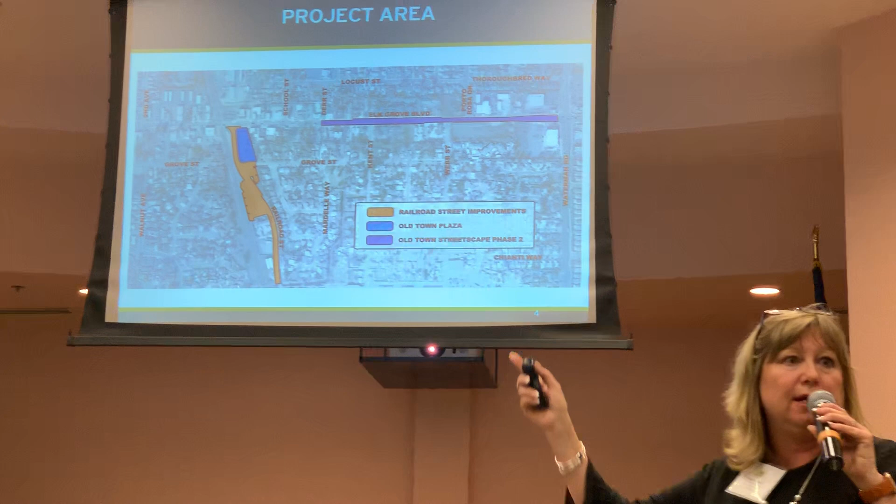This is the project area. As you can see, the orange is Railroad Street, the approximate boundary of the Railroad Street improvements. We'll show you more about that. The blue is Old Town Plaza, where we have the food truck mania events right now, the farmers market, and various events like that. In purple is Elk Grove Boulevard, the section where the Phase 2 Old Town Streetscape improvements will be happening.

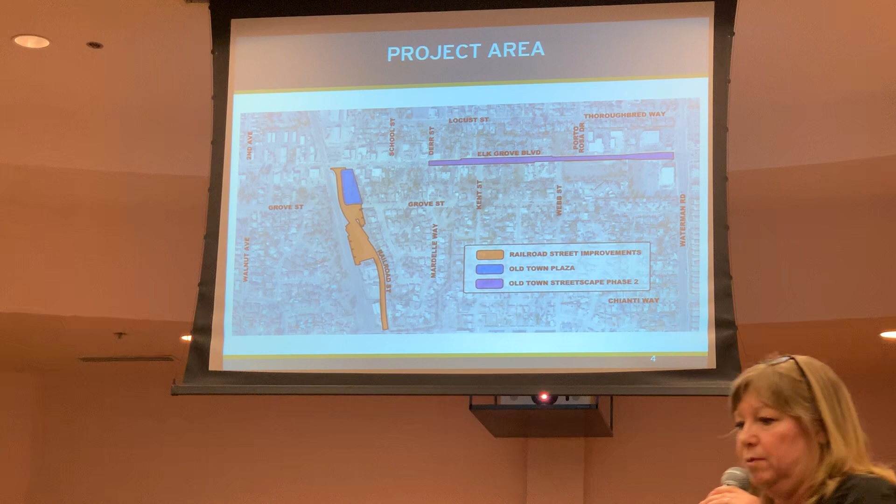All 3 of these projects are priority projects for our city council. With the 3 projects, we want to really create an area that people want to go to, where people want to spend time. We want to provide improvements that will allow people to get there more easily, whether they're biking, walking, driving a car and need somewhere to park, taking public transit, ride shares, whatever it might be. We're trying to incorporate all of those features into our projects.

We want to create opportunities for people to spend time and enjoy the businesses that are in the Old Town area, and help improve the economic vitality of the Old Town area.

So this is Railroad Street. These are some photos of the existing conditions out there. You can see the street, although it's paved, it's not fully improved. It doesn't have sidewalks, curbs, or gutters, none of that. There's limited sewer, it doesn't extend down Railroad Street, though there's sewer in Grove Street. There's no gas in Railroad Street.

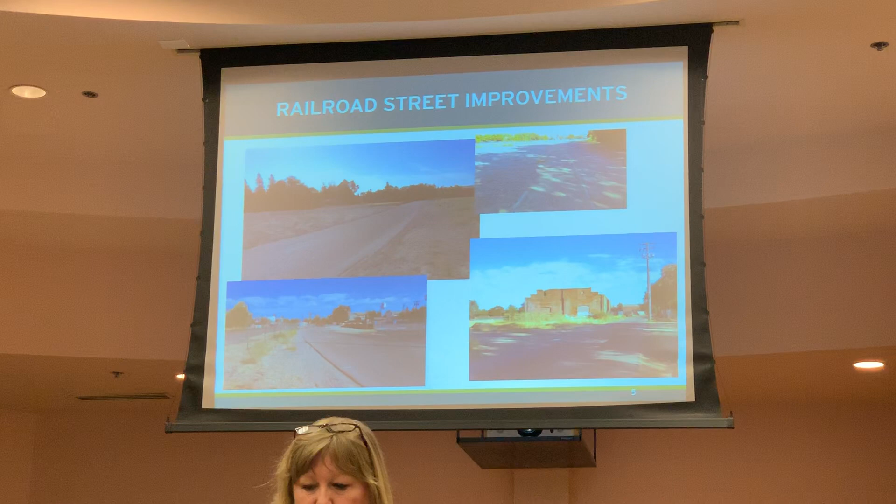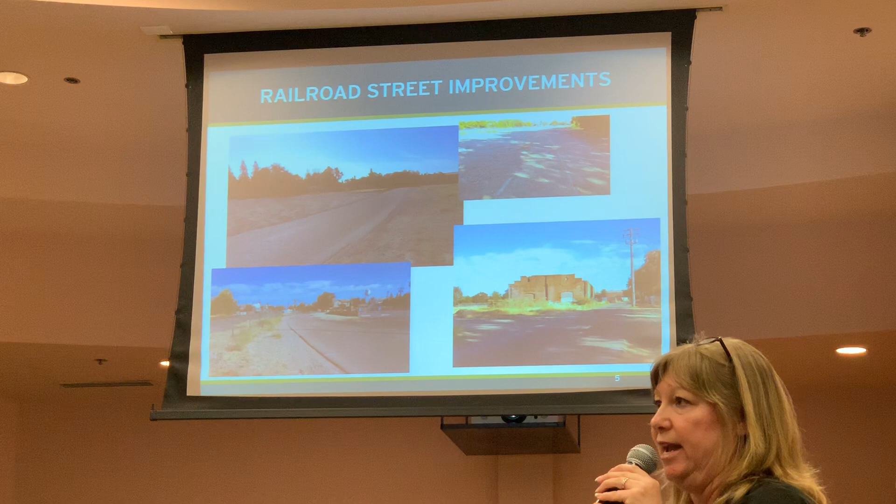The area is very flat. When it rains, water ponds and there's surface flooding that happens in the area. There are existing overhead utility poles you can see in the pictures. And the 2 parking lots that the city uses for large events are currently basically dirt parking lots - they're not improved, not paved, and don't have accessible parking spaces in them.

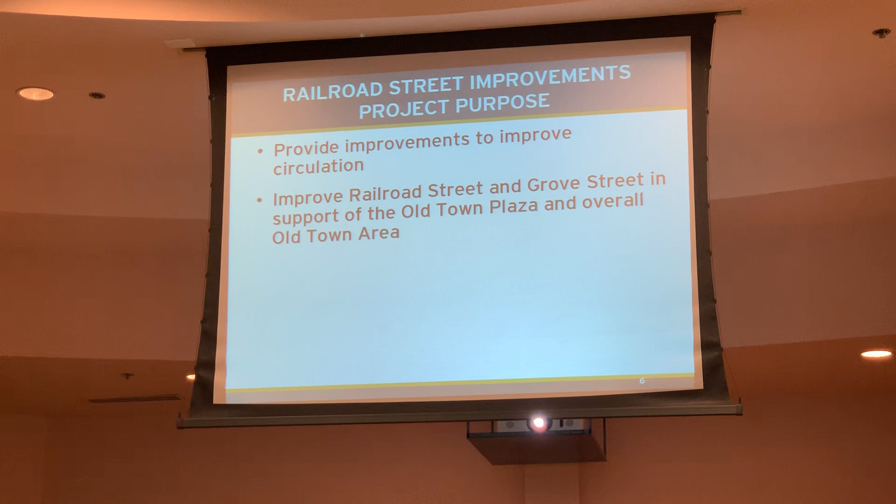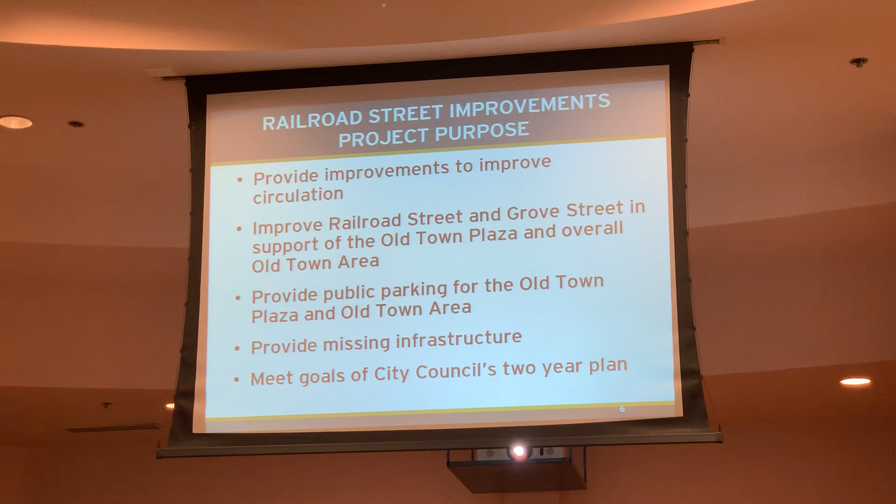The purpose of the Railroad Street Improvements Project is to provide the improvements necessary to improve circulation. We're putting in sidewalk, curb and gutter, and more parking. We're going to improve two streets, Railroad Street and Grove Street. That will help support the Old Town Plaza and the overall Old Town area. Having those parking lots and street improvements will help create a better environment for people to come enjoy Old Town and frequent the businesses there. So providing public parking and the missing infrastructure I mentioned, all of this will help us meet the goals of the City Council's recently adopted two-year plan.

This board is in the back, in the center of the room. You'll be able to see it more clearly when we reconvene there. This shows the Railroad Street improvements. The black area shows the streets we're improving, from Railroad Street, from Elk Grove Boulevard down to, if you've traveled down Railroad Street, there's a small culvert bridge that goes over a drainage channel, and that's where the improvements end. We're not crossing that bridge right now.

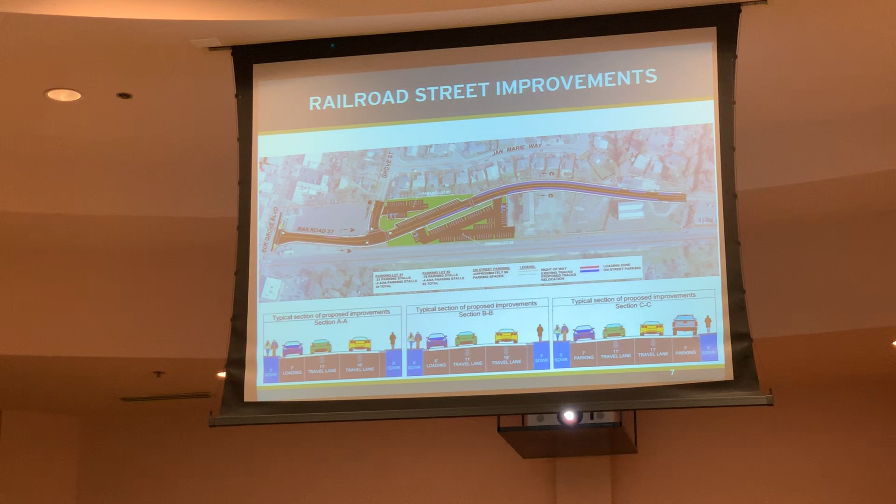And then also Grove Street to the edge of Old Town Plaza. The two parking lots are shown in black, the paved surfaces. The green area around the parking lots are landscaped areas. There's an existing railroad spur out there that's abandoned. We're going to relocate that and incorporate it into our landscaping along one of the parking lots to continue that feel of the railroad through our project.

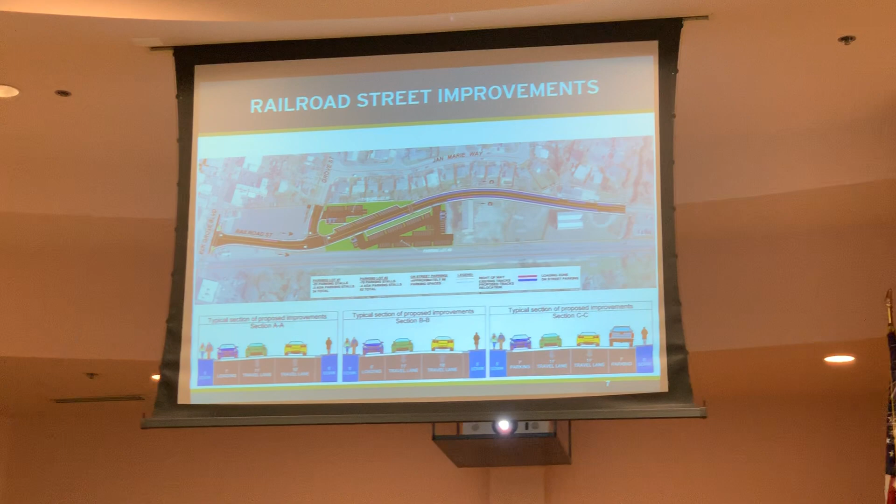We will be planting trees, we will be providing landscaping. It's difficult to see on the screen, but when you go back to the board, we have pink along Old Town Plaza and further south on Railroad Street, which depicts a loading and unloading zone. Could be used for pick up, drop off, ride sharing like Uber, Lyft. We're providing on-street parking, both angled and parallel. You'll be able to better see that on the board.

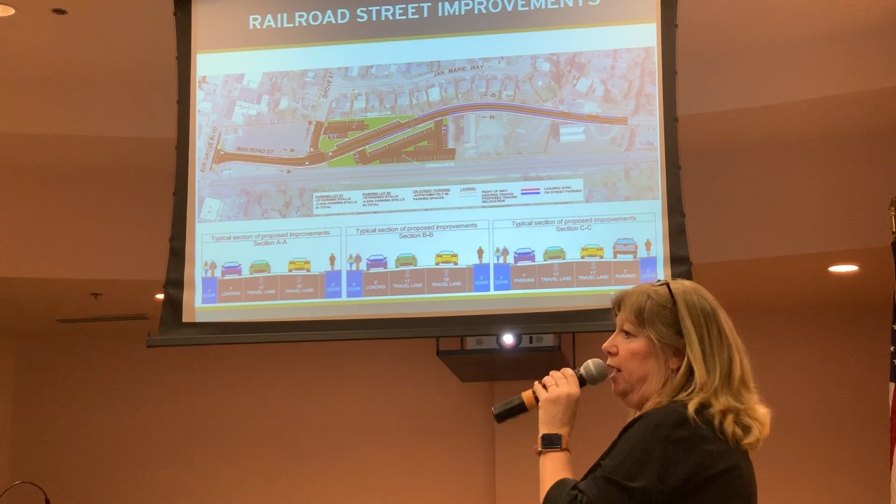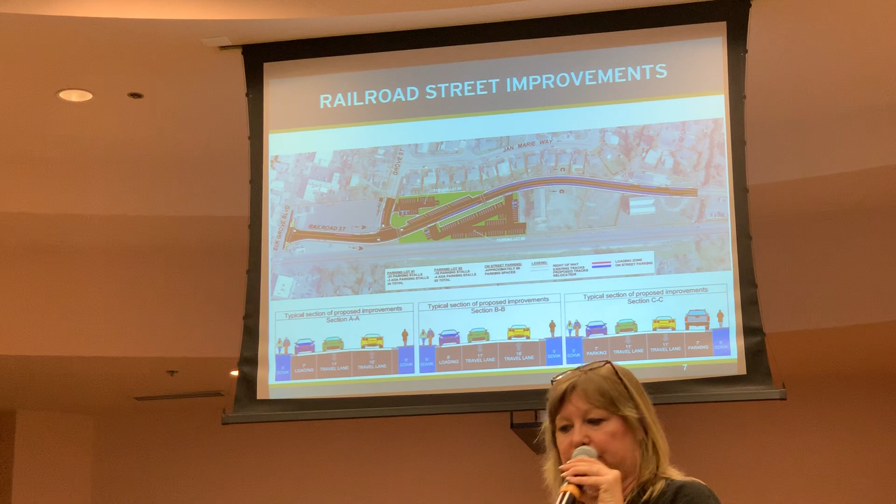We have some stormwater treatment areas incorporated into our parking lots to treat the water before it goes into the storm drain system that we'll be constructing. And then we'll be providing the necessary utilities. We'll be extending water, sewer, and gas throughout there. We'll be undergrounding the existing overhead utilities. So all that will be happening with the street improvements.

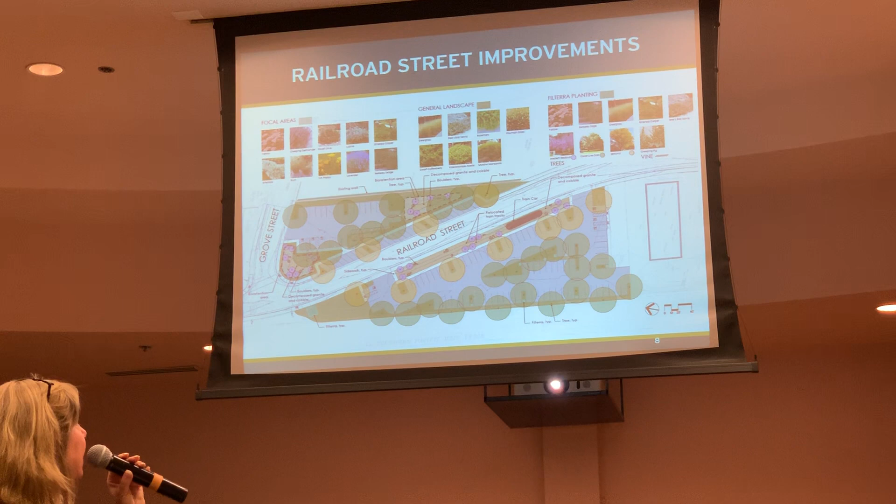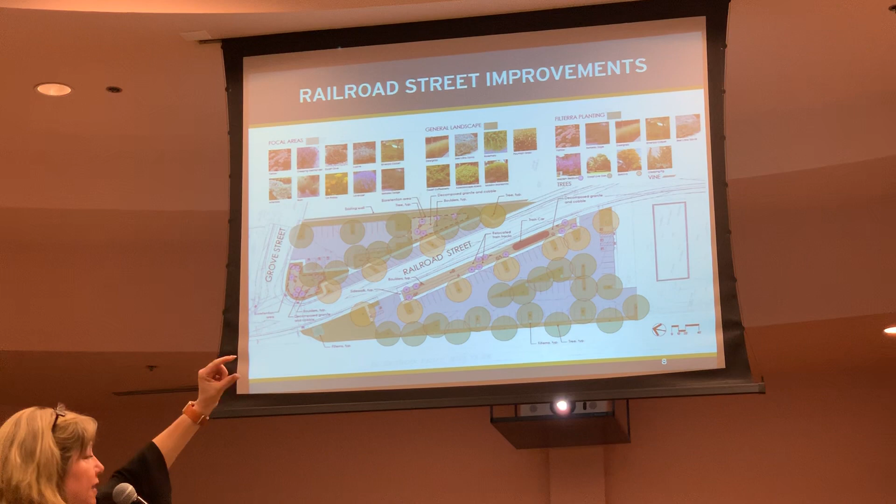Here's just a conceptual plan showing some of the landscaping that may go in with Railroad Street. We're still working on this design, but this shows the two parking lots, which will be the main focus of our landscaping features through this project. As I mentioned, the railroad spurs that will be relocated are on the top part of the larger parking lot. You can see that linear strip where they'll be. We're still working out the details of what it will look like, but they will definitely be incorporated.

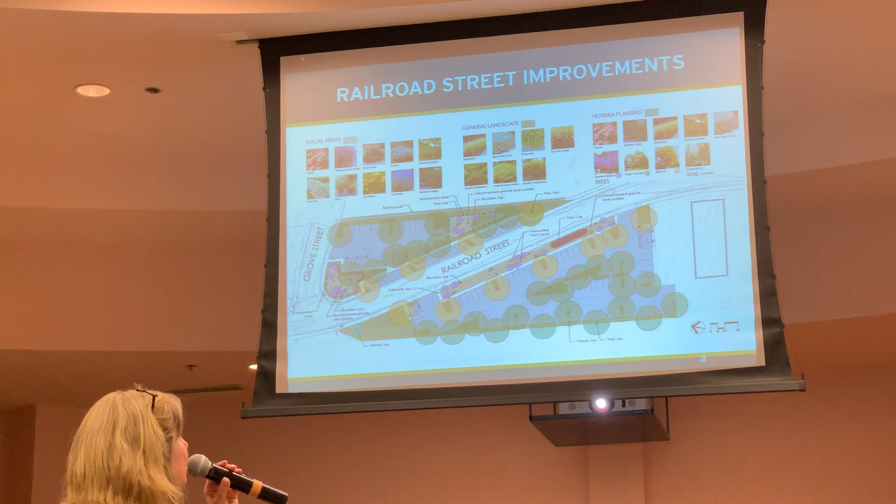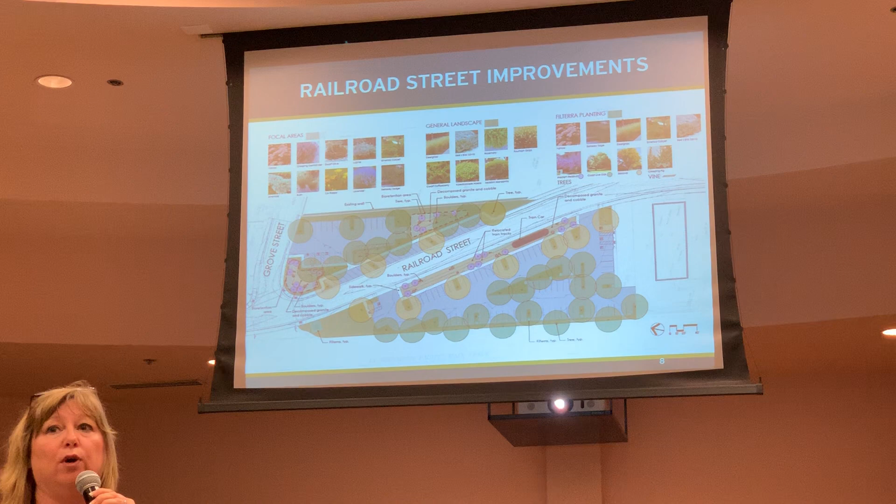We're providing some unique storm drain inlets that allow us the ability to do landscaping in them, so it provides landscaping as well as a filtration system for our stormwater. It's kind of a neat addition to the project as well. I think that pretty much covers the Railroad Street improvements. It's a fairly straightforward project, putting the street and utilities in and paving the parking areas, but it's going to provide some really much needed improvements to the area.

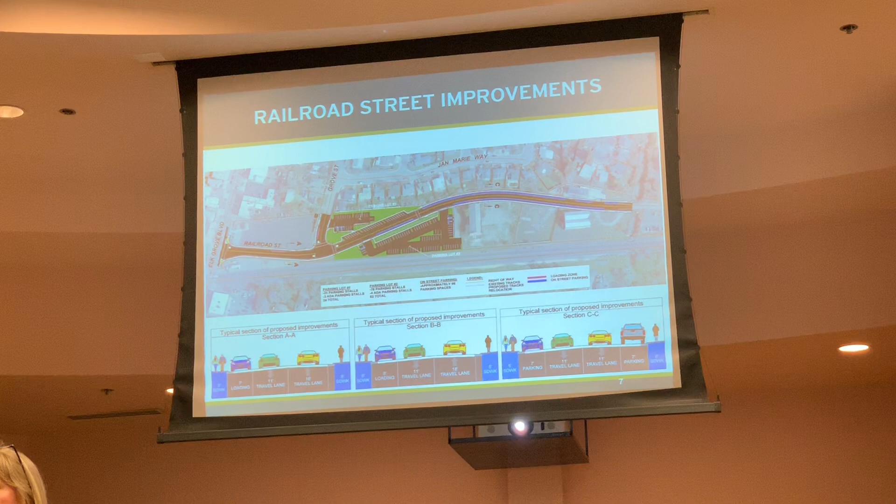Let me go back, actually. One thing I didn't mention is right now, if you live in the neighborhood by Jan Marie Way, there's no sidewalks to walk on to get out to Elk Grove Boulevard. So you're walking on the edge of the pavement or in the street, or walking across parts of Old Town Plaza or across it when it's open. That's really going to provide a nice feature for the people that live in the neighborhood there to be able to travel and walk on foot out to the businesses.

So the next steps, well, we'll take the feedback and input we get tonight from all of you. We'll come back as a design team and review that, discuss it. If there are things that were mentioned that we don't currently have in the project, we'll talk about how we can possibly incorporate it.

Right now, our environmental document for this project is being circulated. It'll be on circulation to the public through May 24th. If you have comments on the environmental document, we ask that you submit them in writing. We can take your comments here tonight as well if you want, but we do like to have them in writing when it comes to addressing the environmental document. I have business cards on the sign-in table you're welcome to take.

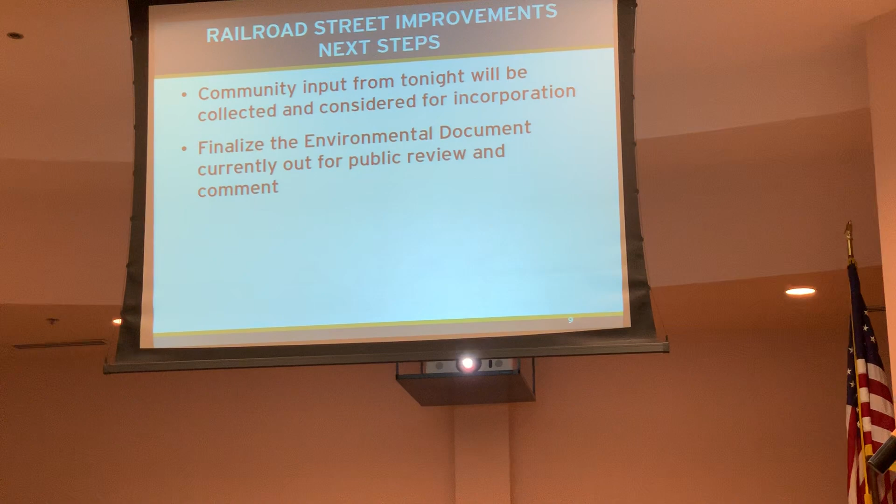And then that document will go to City Council as well. You'll have an opportunity at that City Council meeting if you wish to speak about the project.

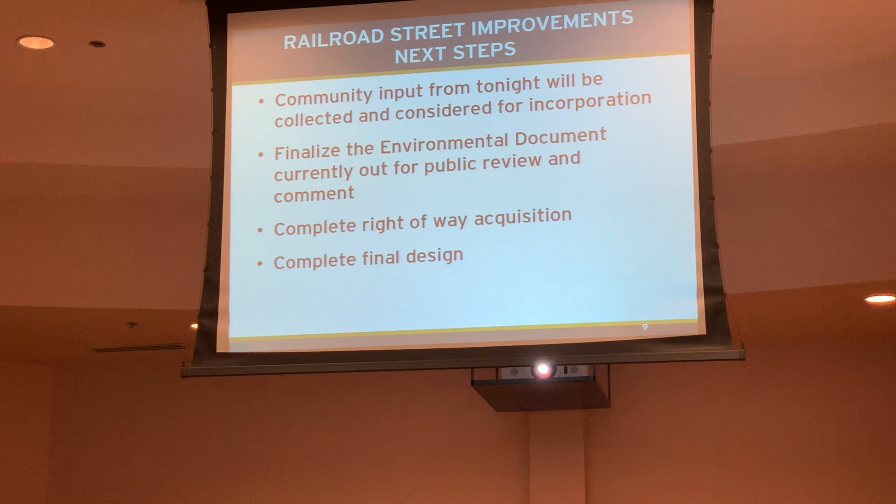We have some minor right-of-way acquisitions up here. We have one right-of-way acquisition we're working on with A1 Towing, and then we have some dedications from city and developer-owned properties being made to perfect the right-of-way. There isn't actually a right-of-way out there right now, but there will be. We're working on finalizing our design, expected to be complete in July. We'll prepare the bid documents, go out to bid, and should be in construction this fall.

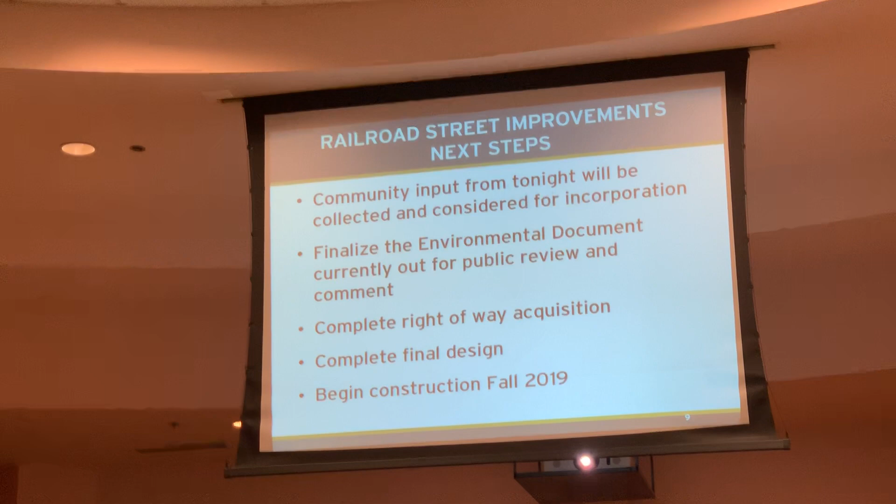With that, I would like to turn the presentation over to Brian Fletcher with Callander Associates, who will speak about the Old Town Plaza Phase 2 and 3 improvements.

Oh yeah, center button? I'm not sure if it's going to work. I was afraid to push the buttons and do it wrong. Good evening, my name is Brian Fletcher. Can everyone hear me? Not quite used to microphones and such. I promise not to do my singing or Frank Sinatra impersonation or anything.

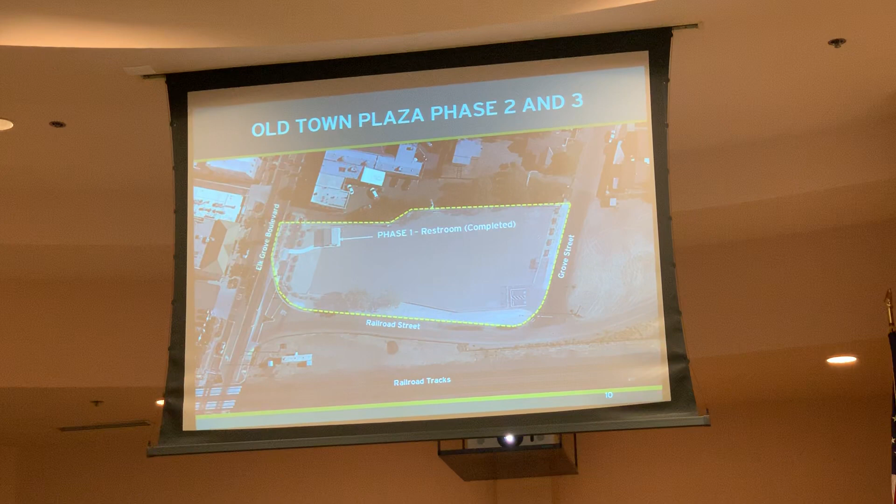I'm going to talk to you about Old Town Plaza, Phase 2 and Phase 3. I'll get to why there's not a Phase 1 - it's actually been constructed already. Just to give you a bit of orientation on where the plaza itself is going to be: Elk Grove Boulevard, Railroad Street, and Grove Street. The railroad tracks are down at the bottom of this. We did change the orientation of north-south based on some of those other drawings, so I wanted to make sure you understood where that is.

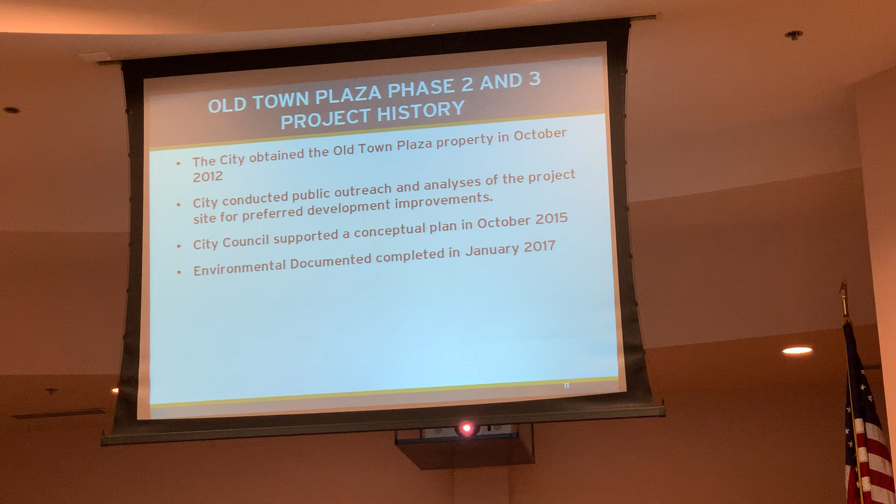Let me give you a little history on this project, because there has been some work done to date. Back in 2012, the city purchased this property from the railroad for the purposes of creating a plaza in Old Town. At that time, the city conducted outreach to analyze the best use and what the community wanted. That input helped develop a preliminary concept plan that was approved by council in 2015. The environmental document was completed in 2017 for the project.

Phase 1 improvements - anybody seen the restroom out there? That's Phase 1, progress has been made. That was completed in 2017, and you'll see the plans kind of work off of that aesthetic, you know, the heavy timber look and the location of that.

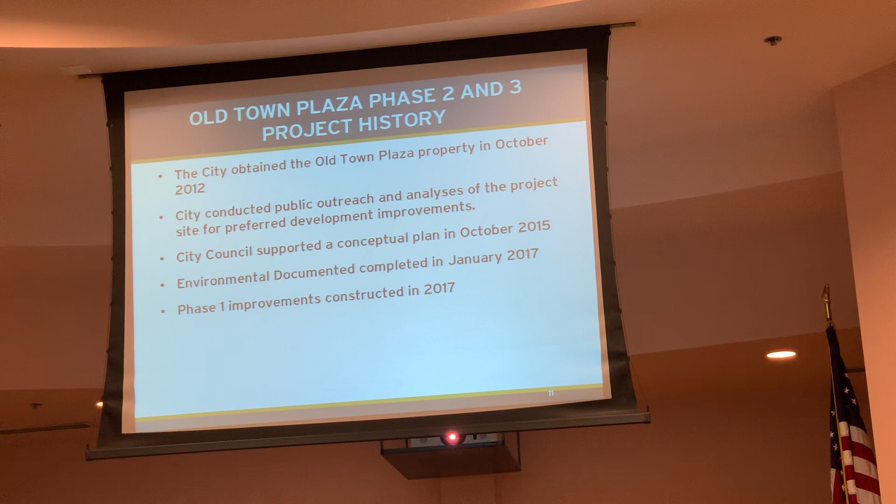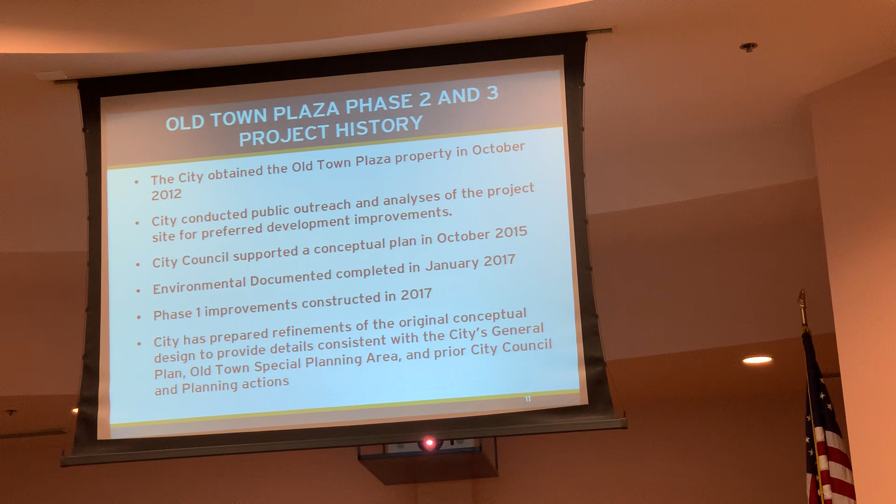So what are we doing here tonight? Well, the plan back in 2015 was a concept plan - very loose, had some information, but maybe lacked a little bit of detail and character. What we've developed is a more refined plan that respects that concept plan, provides the same amenities, but provides some more detail for you guys to respond to tonight.

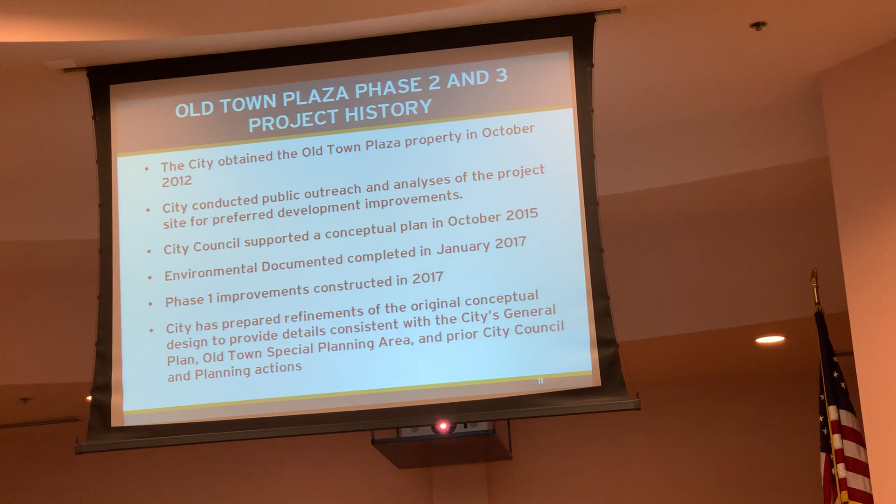Essentially, we are looking for your input on the refined plan and looking forward to having those conversations. I'm going to go through some detailed plans, probably fairly quick. There's a lot of information and detail on the graphics, so I invite you to come into the back corner, grab me, and I can walk you through the plan and point at different things to help you better understand.

So the purpose of the plaza is multifold: create a community gathering space, provide public seating, and provide a flexible space to accommodate multiple size events - to make the space comfortable for an individual to come on a daily basis, but also accommodate larger events you've seen out there over the past few years where food trucks come in, and also to accommodate a farmer's market.

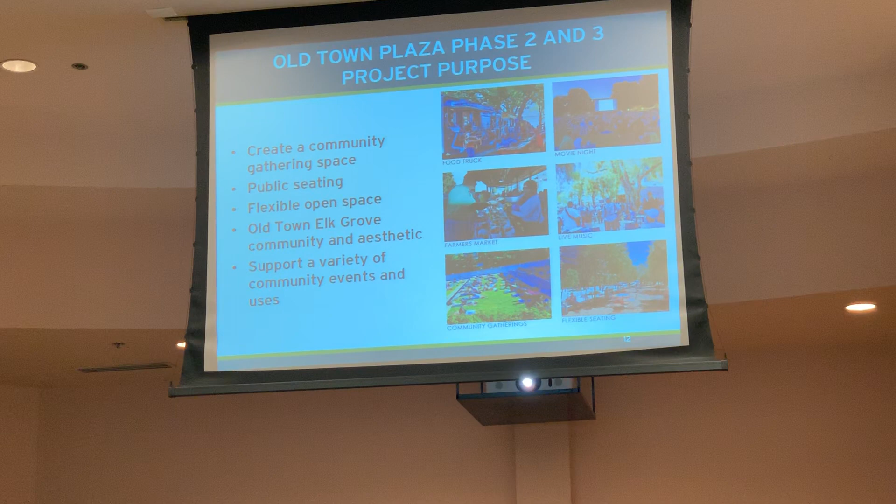To incorporate the old town aesthetic, taking cues from what's going on with the streetscape, and making sure this plaza looks the same, speaks the same language. And then, support a variety of events - food trucks, movie nights, heaven forbid a yoga class or outdoor exercise class could be really neat out there, and provide spaces for live music and such. So those are some of the events we'd be contemplating and trying to provide a space for.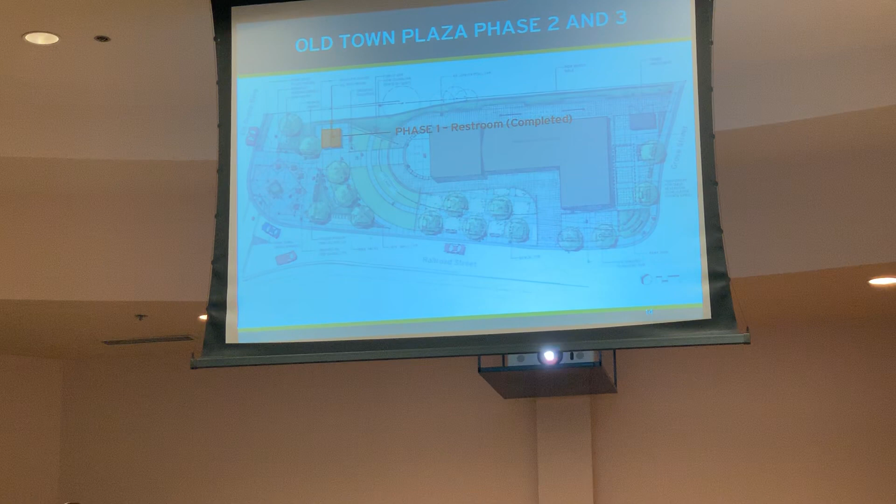So this is the concept plan that I'll walk you through. Phase 1 was that restroom I talked about, so Phase 2 is the front portion - this is the plaza bordered by Elk Grove and Railroad Street. We've oriented that plaza towards that intersection to better relate to the crossings and pedestrian crosswalks, and to provide kind of a gateway to old downtown.

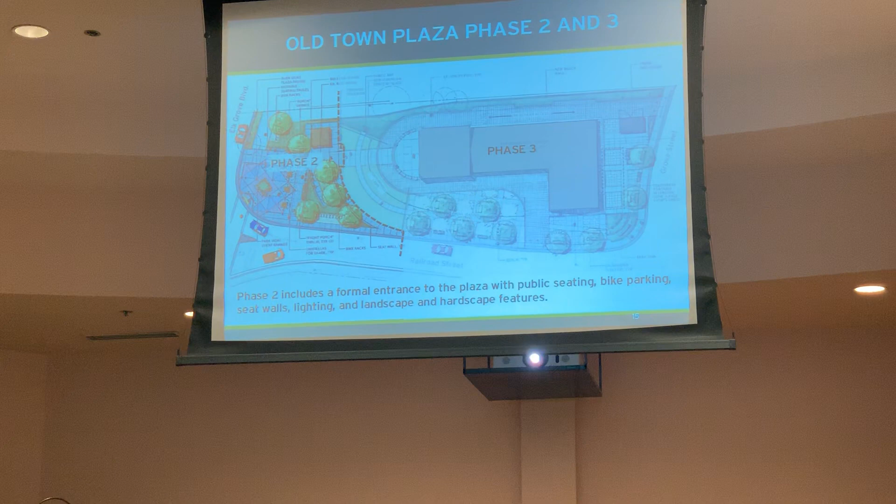The plaza itself has a unique paving pattern that harkens to barn quilts located throughout the country, to give it an old town community feel and speak to what we think old town is all about.

Creating a front door, a front porch for this plaza. There are two trellises that provide shade. Please come up and talk to me and I can show you where those are located. We think maybe a fun feature would be a porch swing underneath those trellises.

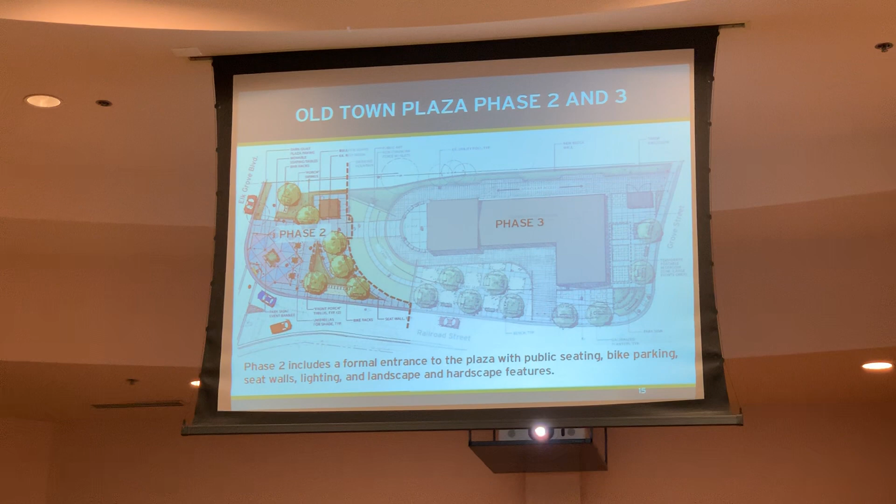This would be a space on a day when there's not a whole lot of people, where you can come out and have some lunch and swing on the porch swing, making it a unique space even for the smallest of groups. So that's, in general, what phase 2 is.

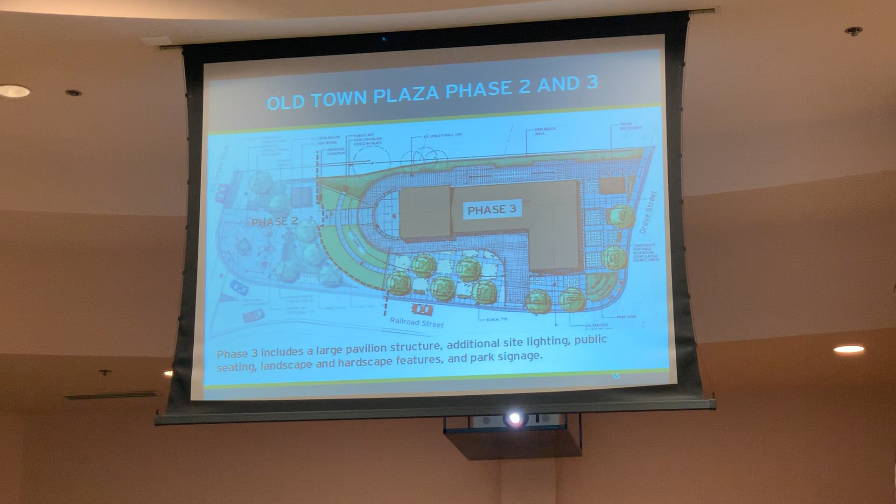Phase 3 is the larger area. The biggest feature is the open air pavilion, similar to what you'd see in Davis with their farmers market. This would provide shade and rain protection, but there wouldn't be any walls—just posts and completely open. It would reflect the same character as the restroom, heavy timber and such, to make a cohesive appearance.

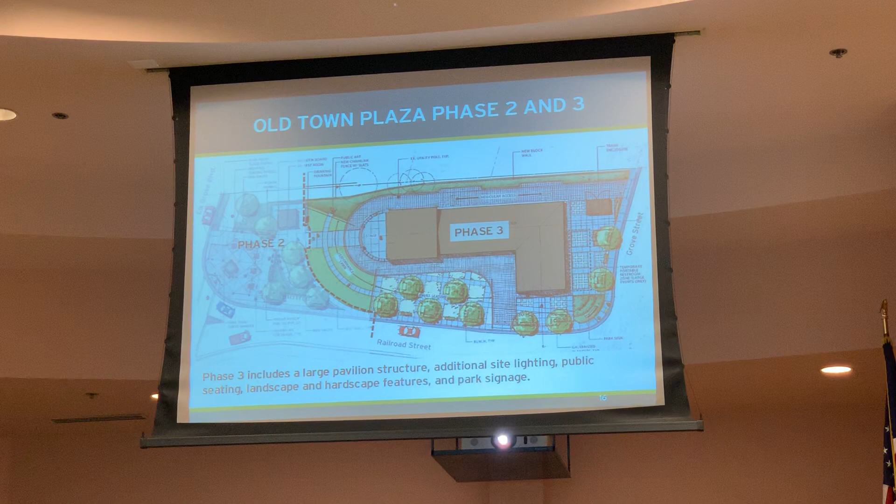We provided areas for food trucks to drive into the site and stage, so you can have food trucks there. The pavilion itself would provide areas for picnic tables for people eating food from the food trucks, and opportunities for downtown farmers markets, with spaces all around as breakout areas for people eating their food and staging into the farmers market.

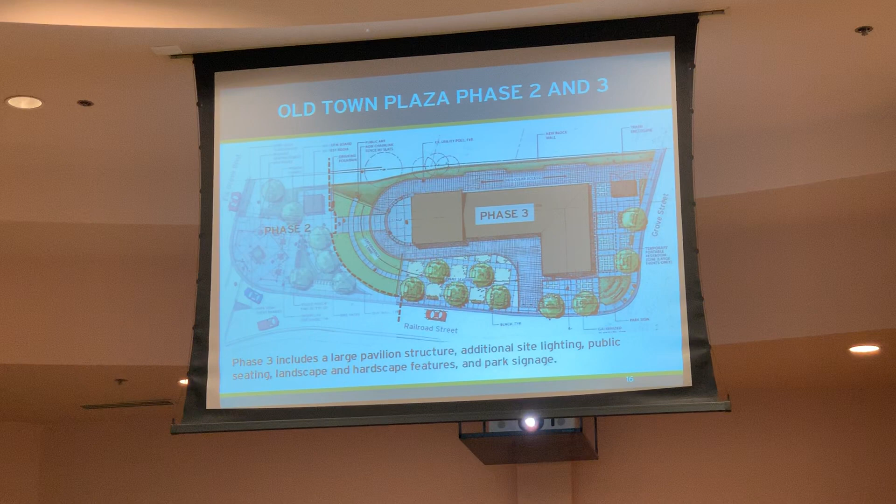We've identified a performance area in the front. It's a level space that would allow a small band to set up. The open lawn area in front of that would provide informal seating, to lay out a blanket or additional seats to enjoy a concert. So those are the main features of phase 3.

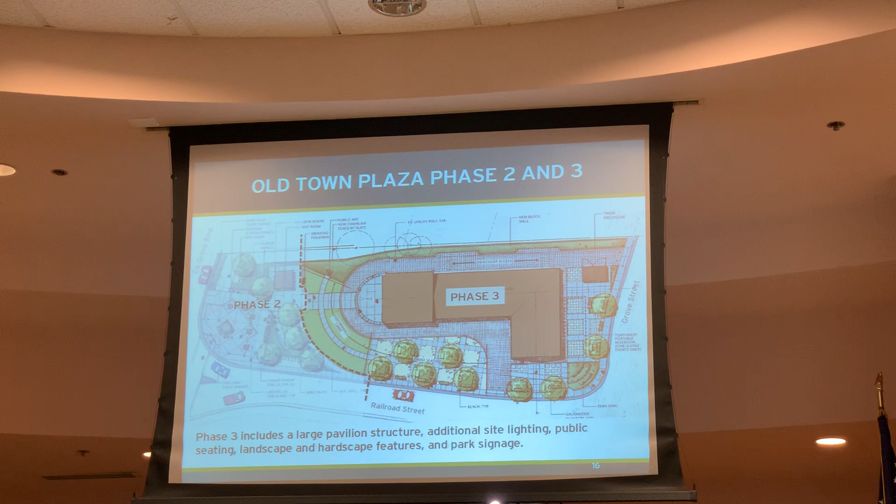Please come up and talk to me about some of the details, and I can walk you through the plan. What are the next steps?

Tonight we're looking for input. We've got a bunch of Post-it notes there—write on them, because we want to hear what you like about the plan and also how you think it could be improved. We want to hear both, so we can consider that for incorporation.

We have some work to do. These plans are conceptual right now, but the next step is to go into construction drawings. We get a little more detailed, and we need to understand where points of connection are for utilities and such.

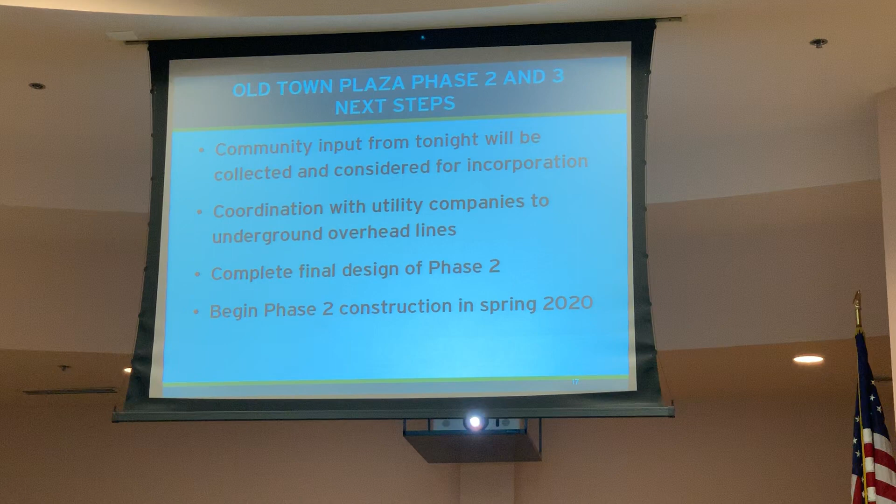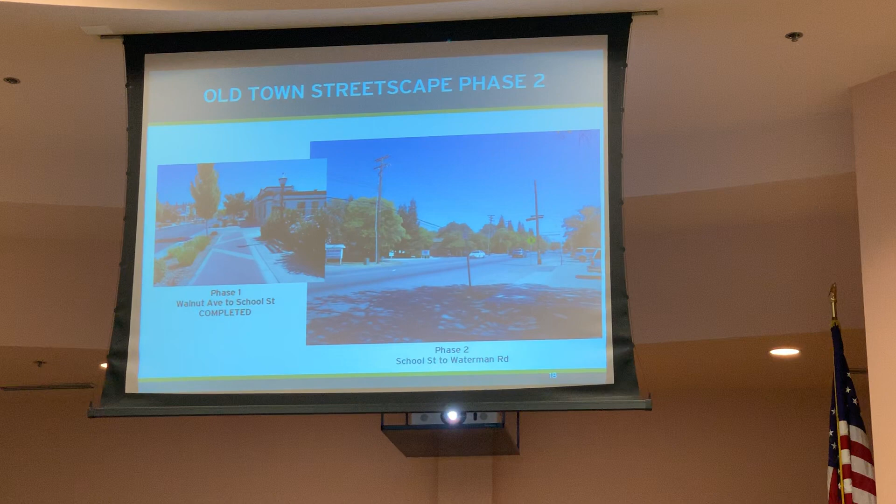Thanks, Brian. Now Jacqueline Lockhart with Dokken Engineering is going to speak to you about the Old Town Streetscape Phase 2 project. Jacqueline is the project engineer and project manager for both Railroad Street and the Old Town Streetscape Phase 2 projects.

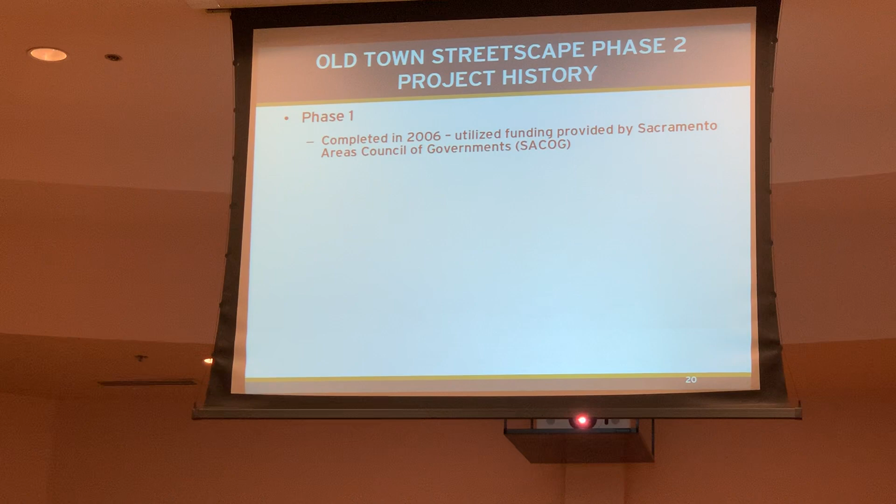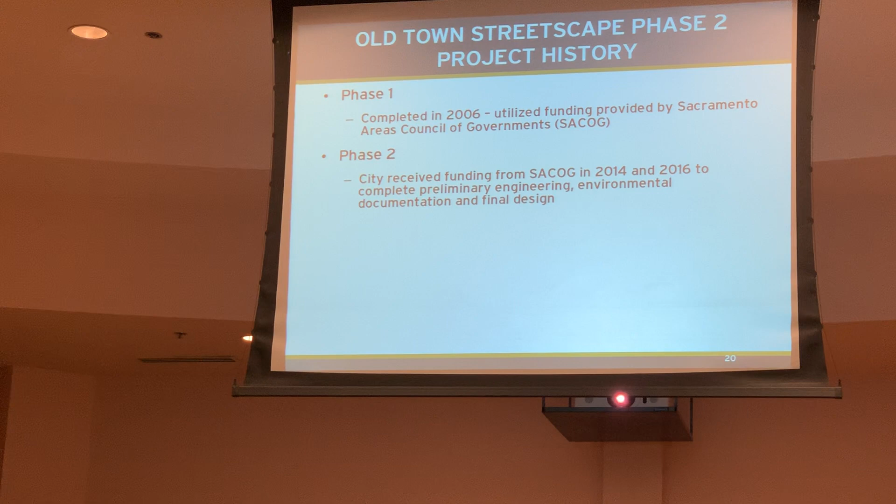A little bit of history: phase one was completed in 2006. The city used money received in a grant from the Sacramento Area Council of Governments, SACOG. For phase two, the city received additional funding from SACOG in both 2014 and 2016, and that money has been used for preliminary engineering, environmental work, and is currently funding the final design going on right now.

An initial public workshop for phase two was held in 2015, and we received input on things people didn't like about the phase one project, and things they did like—so we could take lessons learned and what people liked from phase one and incorporate it into phase two.

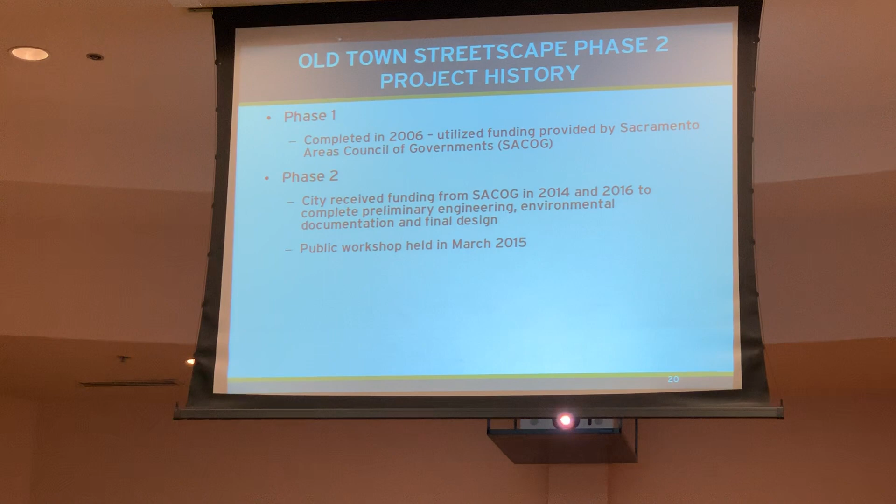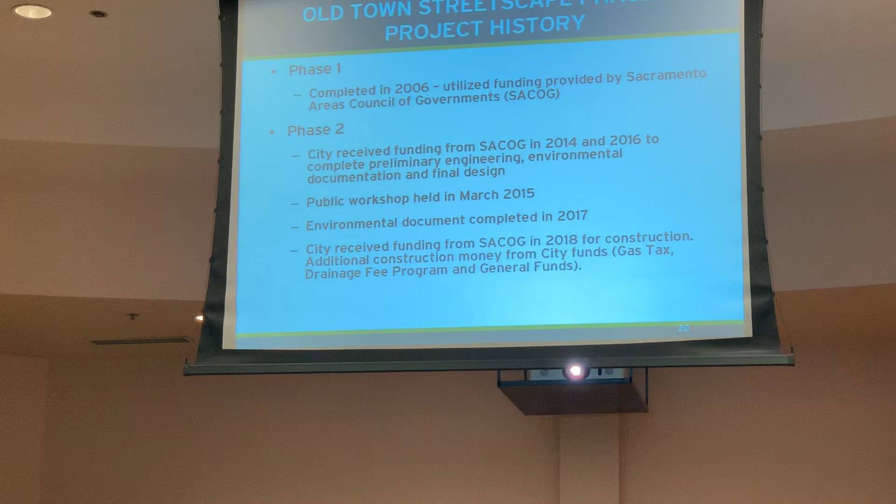The environmental document for phase two was completed in 2017. Just recently, at the end of last year, we received additional money from SACOG to fund construction of the phase two projects. The city will also be utilizing other funds in addition to that money, including the gas tax, the city's drainage fee program, and some general funds.

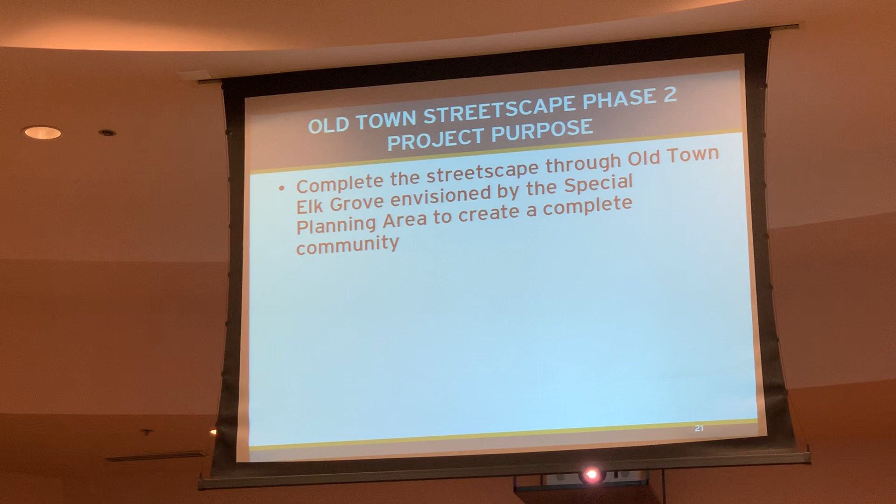Wait a minute, so these are two different projects with two different timelines? No, phase one's already been constructed. So we're talking about just phase two right now.

But I thought it was said that the environmental impact report has not been approved. It was completed in 2017 for the phase two project. The environmental document for Railroad Street is being circulated right now.

So we have three projects we're presenting tonight: Railroad Street improvements, Old Town Plaza phase 2 and 3 improvements, and Old Town Streetscape phase 2 improvements.

I hope you understand that I tried to follow this. I live down the street, and I got a notice, but it didn't really describe what the project was. Now you've got three projects with three different timelines and three different fragments of this environmental process, right? Are you shaking your head yes?

Yes, there are three separate projects with three separate schedules. Old Town Plaza and Railroad Street have an environmental document that had to have some supplemental work done to it in order for Railroad Street improvements to be completed. So there's that environmental piece being circulated right now. The rest is environmentally cleared already.

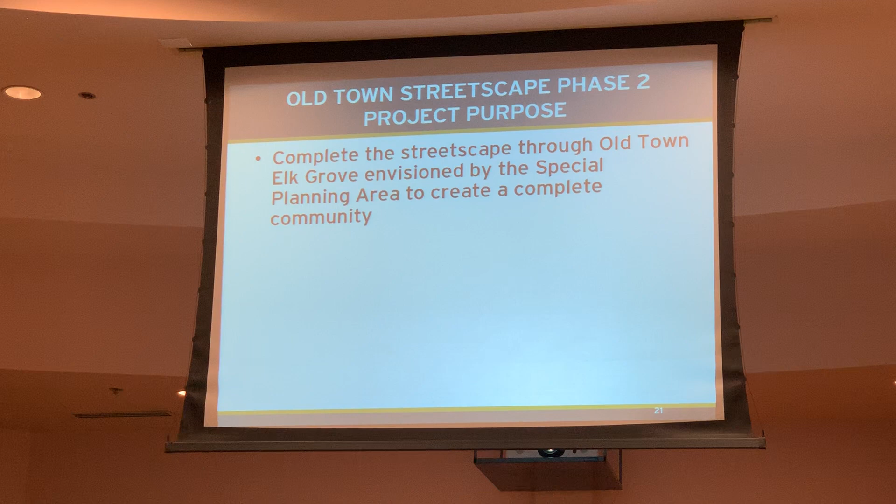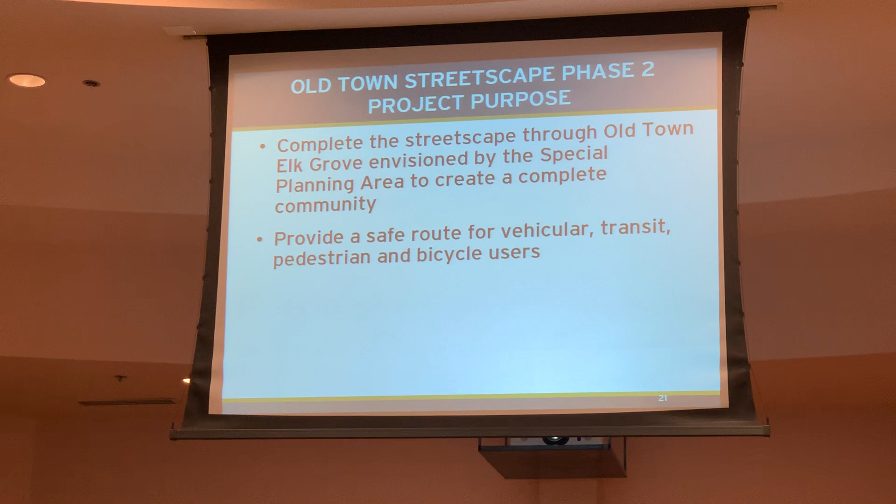The purpose of the phase two project is to complete the streetscape that was originally begun by the phase one project, carrying through the vision that the special planning area for Old Town had all the way through — providing a safe route for all modes of transportation, not just cars. There are no sidewalks through the phase 2 area currently, so we want to make it safe for pedestrians and bicycles, and there are a couple of existing bus stops within the phase 2 area too.

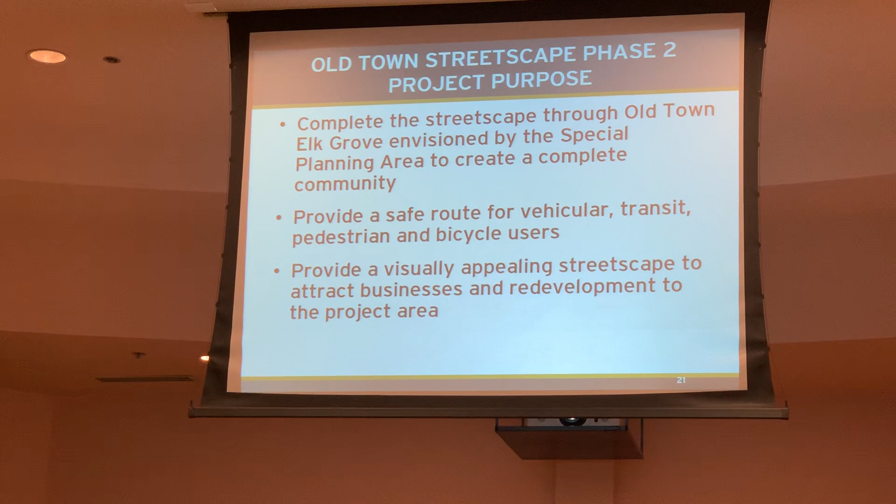Also, we want to provide a visually appealing project, a road that looks nice. This will help attract new businesses and revitalize the area. Part of that involves undergrounding all of the overhead utilities that are out there, which will help with the visual aspect.

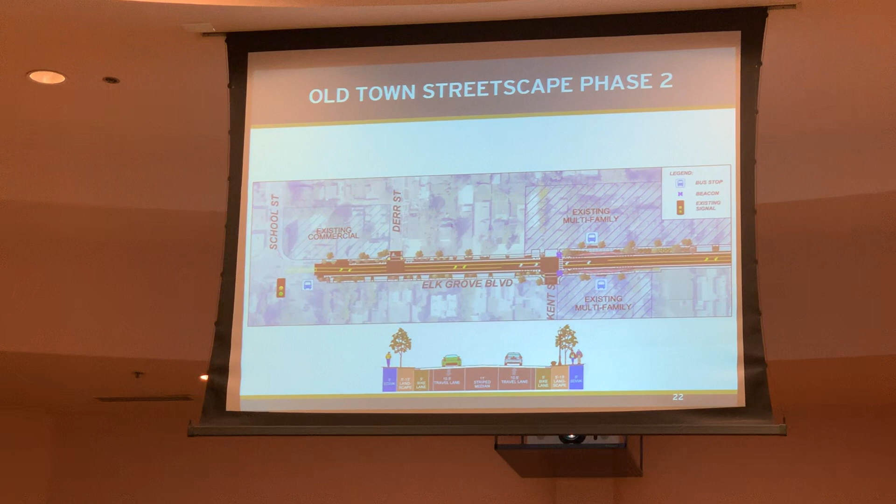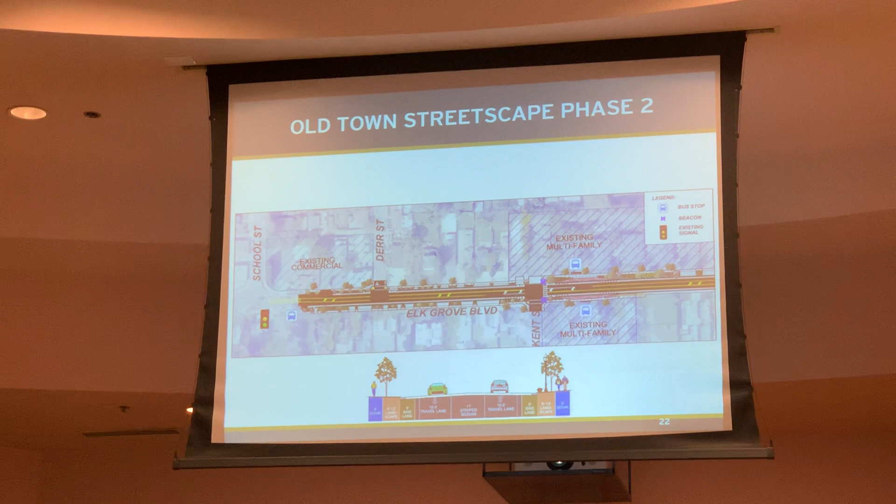We will also be putting in a buffered bike lane, meaning there's a 1.5 foot gap. It'll be striped, separating the actual travel bike lane from the vehicular travel lane.

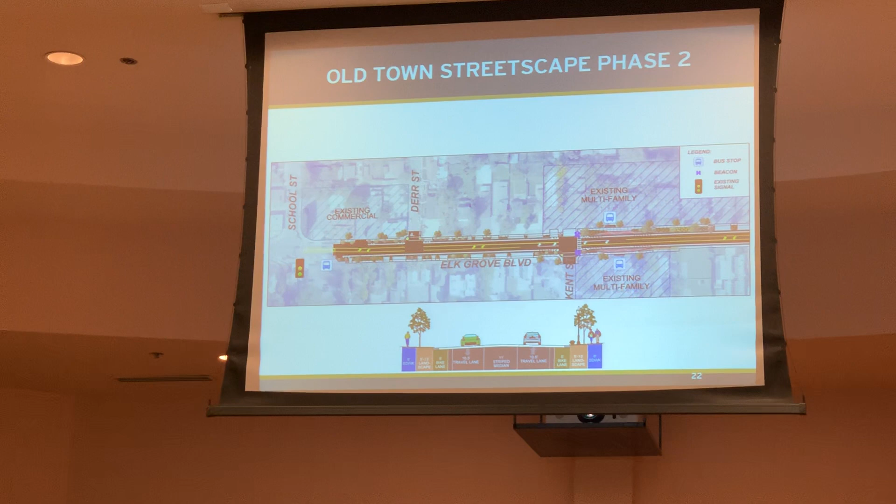There will be landscape strips. There will not be any other raised planters within the landscape strips, as was in the phase 1 project. And then there'll be a sidewalk.

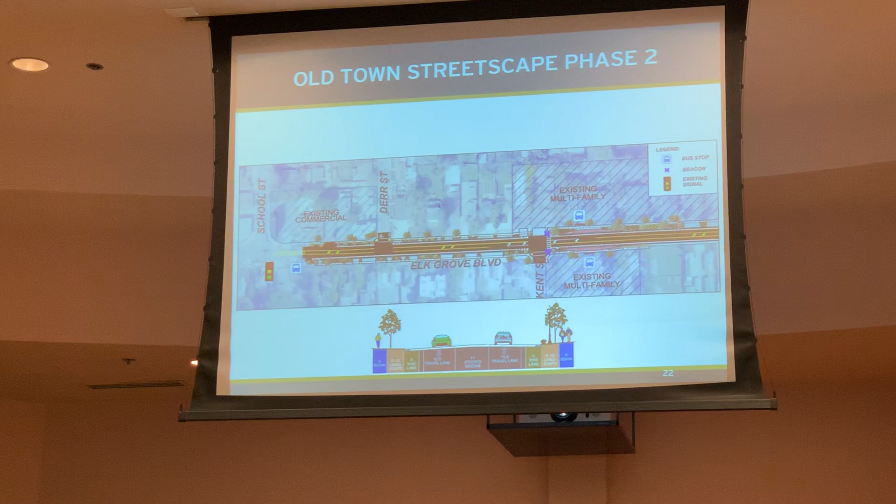All of these improvements, the majority of them, fit within the city's existing right-of-way. The city does not have to purchase any additional land to construct the majority of the improvements.

There are small parcels where the right-of-way hasn't seen any development, where limited acquisition will need to take place. Other than that, with the coming down of all the overhead utility lines, we will need to get some utility easements. Those will be outside of the existing street improvements, and we'll be working with property owners to get those easements that are needed.

There are 2 existing bus stops. Those will remain. We will enhance them a little bit with enhanced shelters. And then additionally, at the intersection of Kent Street, we will be putting in one of the flashing beacons, the pedestrian-activated beacons. Pedestrian presses the button, the lights flash, helps provide a little bit of a safer crossing.

Further down the street, there are some areas where there was some newly constructed sidewalk within the last couple of years. That sidewalk will remain.

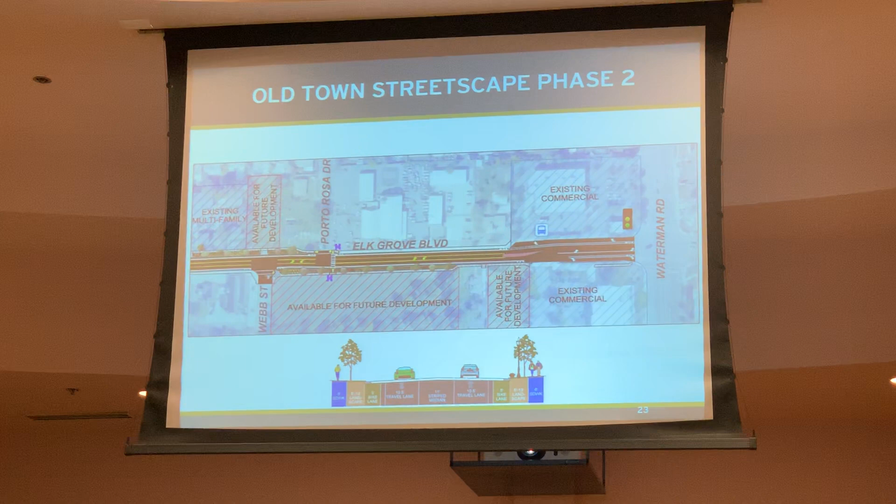And then as we get down towards Waterman, the existing sidewalk that's out there will remain. We will just be resurfacing the roadway.

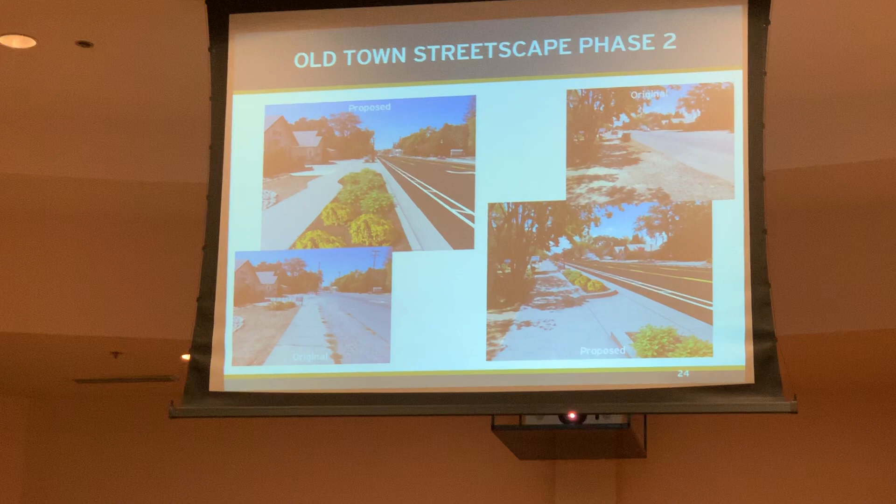So we've prepared a couple renderings. As you can see, within the phase 2 area, there's no curb and gutter, and there's cracked sidewalk in places, and then we will enhance it.

You can see the little striped area, that's the buffer for the bike lane, which will separate the bike lane from the vehicular lane, and then it'll have the 2-way left turn lane.

So the next steps for that, again as it was with the other projects, we're just looking for input—things you like, things you don't like—and how we can incorporate that into the project and make it better.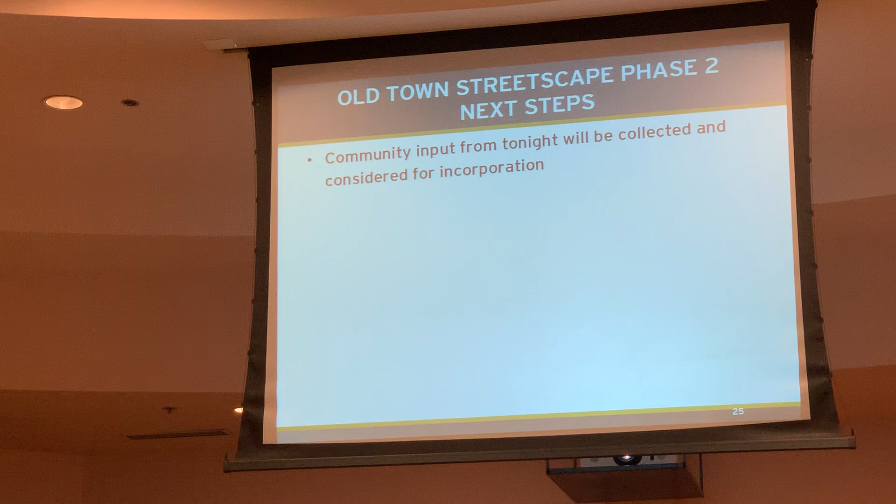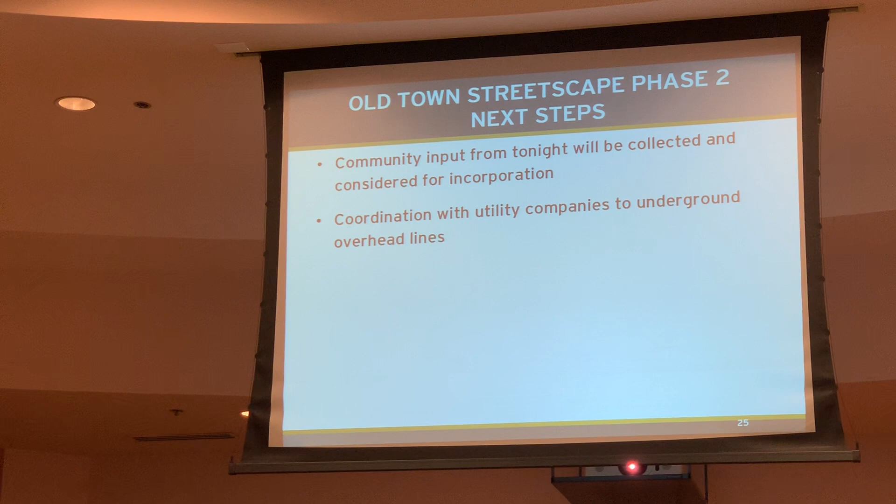We have a lot of coordination with the utility companies because of all those overhead utility lines. There are 5 companies out here that we're working with. So we need to work with them on how that is all going to coordinate.

We will be doing a lot of individual property owner outreach for all of the properties that front Elk Grove Boulevard.

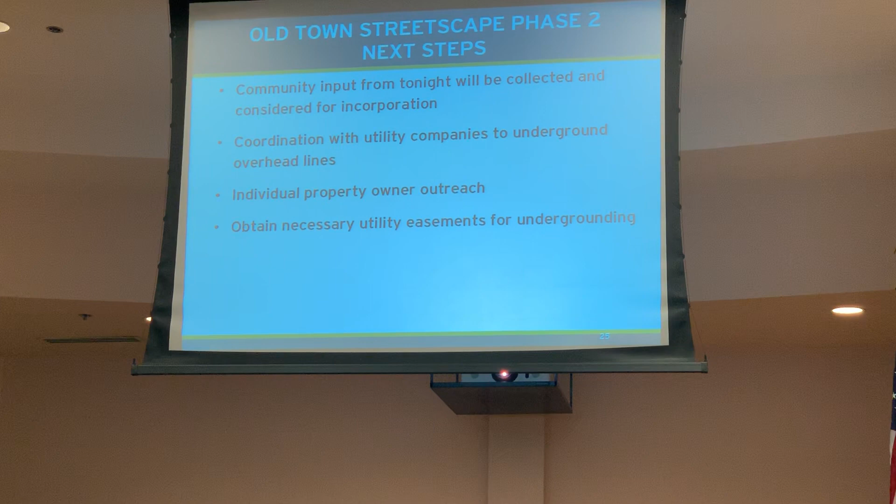A lot of it will have to do with the conversion of those utilities. We'll obtain those necessary utility easements for the undergrounding work. We're working through to complete the final design, and then we're looking to begin the undergrounding of the utilities next summer.

The poles have to go away first before we can do any of the roadway construction, so we'll do the first phase to get all the utility lines down, and then we'll come through the following summer with the actual roadway project.

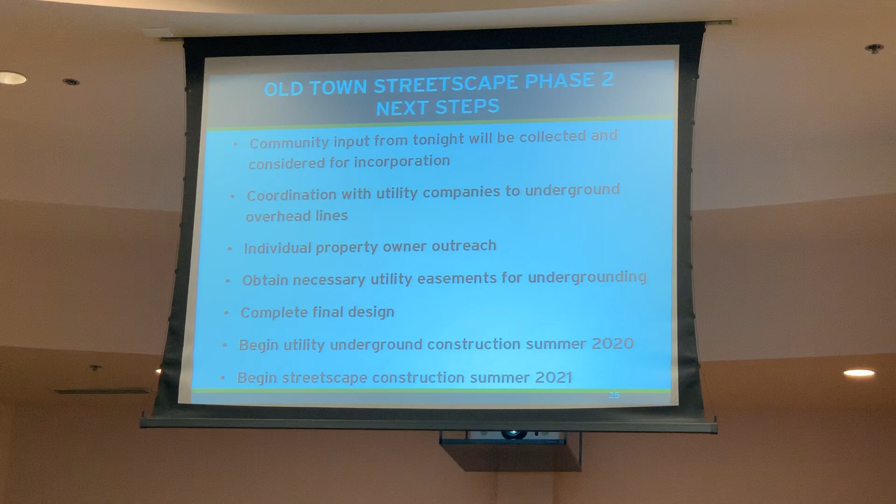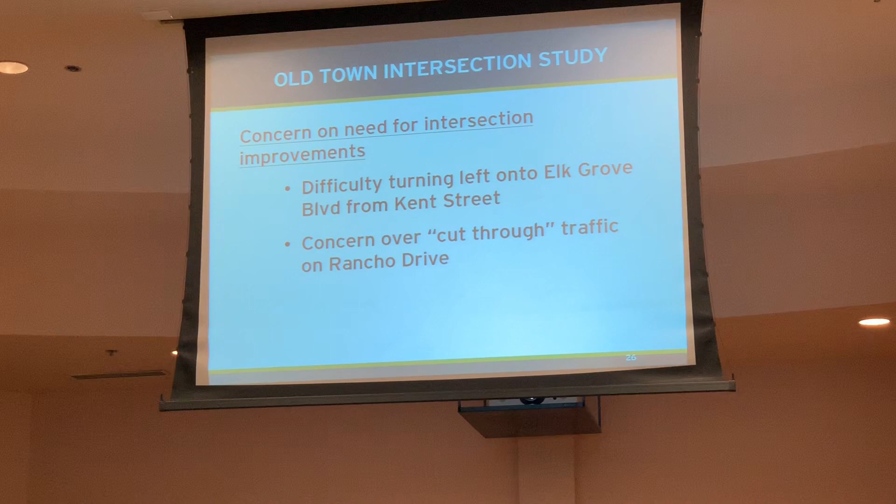Thank you, Jacqueline. So those are the 3 projects we asked you to come here so we could talk to you about. But while these projects have been going on, we've also performed a traffic study in the Old Town area, and Kevin Busey, our capital program manager, is here tonight to speak to you about that study and the results from it.

Thanks very much. So we've heard a lot of concerns, specifically about the intersection at Kent Street—people wanting to make a left turn, finding it very difficult to do that. The second issue we've heard is about cut-through traffic on Rancho Drive, essentially Rancho to School Street. People on Waterman are trying to avoid the Waterman and Elk Grove Boulevard intersection by cutting through that. So we got a study started fairly recently and just completed it.

I'm providing a short presentation on that study, and then I'll go to City Council later. The study covers these intersections: Elk Grove Boulevard and Railroad Street, Elk Grove Boulevard and School Street, and Elk Grove Boulevard and Kent Street, as well as that cut-through traffic.

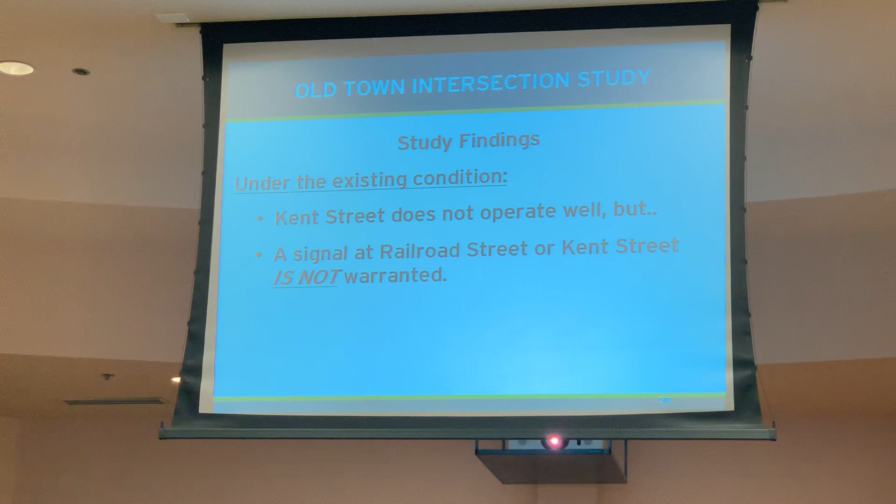So what the study found was that Kent Street and Elk Grove Boulevard do not operate well. It is difficult to make that left turn, but it isn't so bad that you need an actual signal there. It's very close to needing a signal, but it's not quite warranted right now.

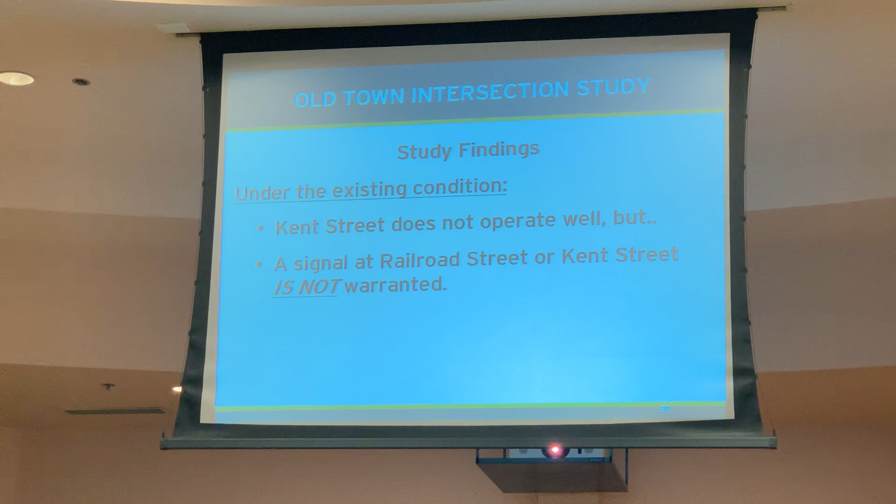If any development occurs south of Elk Grove Boulevard, a signal will be warranted at Kent Street. A signal on Railroad Street could be installed as well, however it'd be very difficult to do that because of its proximity to the railroad itself. If we did look at adding a signal on Kent Street, it would probably provide the most benefit of any location to improve access.

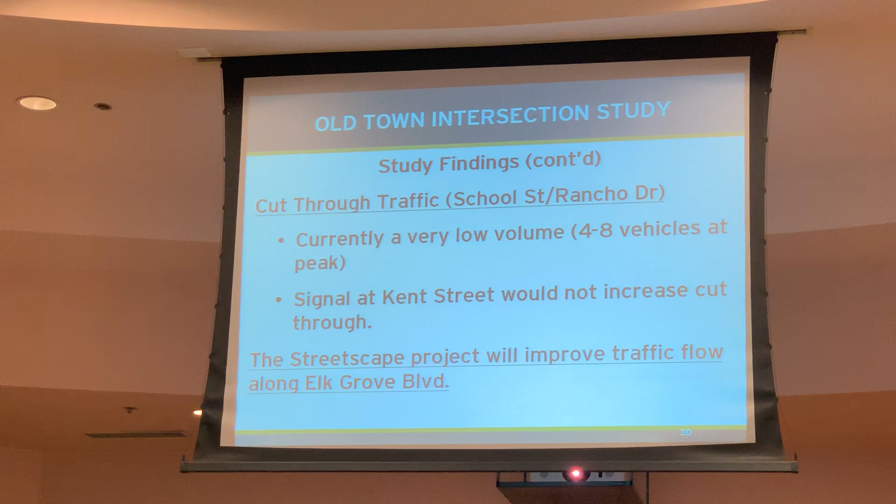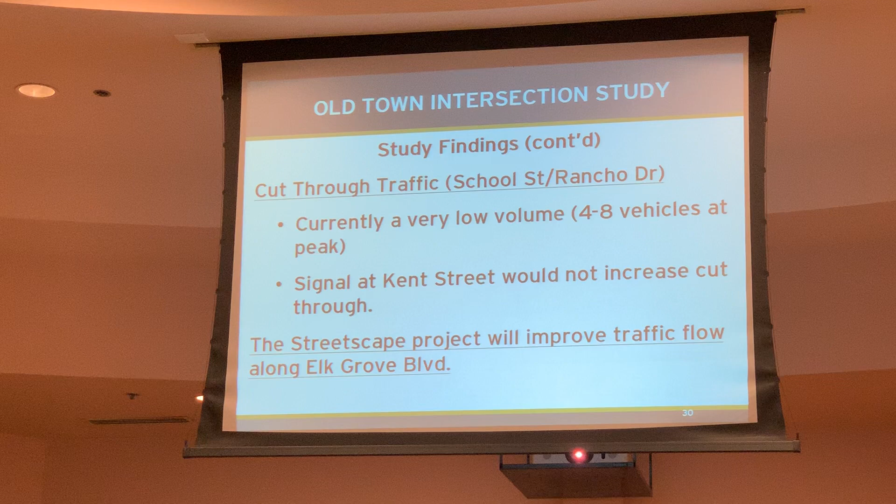You might wonder how that affects the cut-through traffic ratio. Currently, based on our traffic study, there's only 4 to 8 vehicles that cut through there in peak hours, so they're fairly limited. We don't think a signal at Kent Street will really increase that cut-through more. There's currently some traffic already on that road which limits it, and some of the improvements from the streetscape project, like the 2-way left turn lane, will improve circulation.

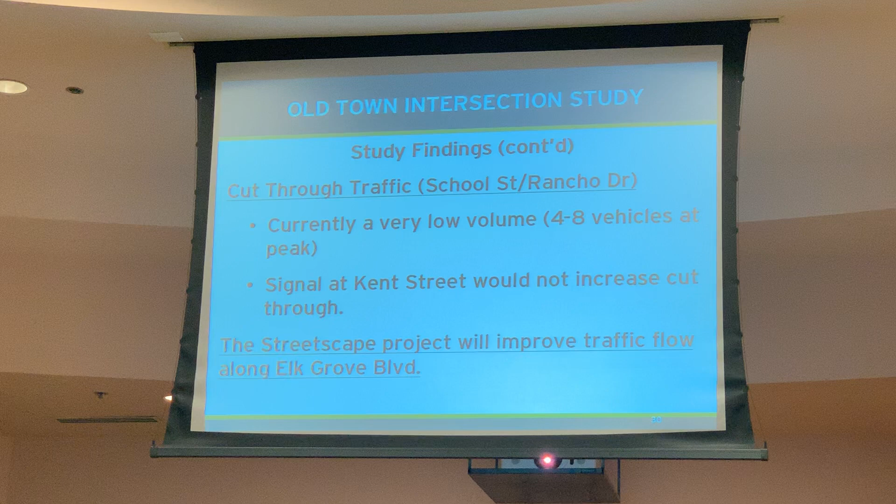So that's generally the findings of the study, fairly simplistic. We're going to present the study to City Council in June, going over what we found, and then look for direction from City Council on whether we create a new project or wait for more development to occur.

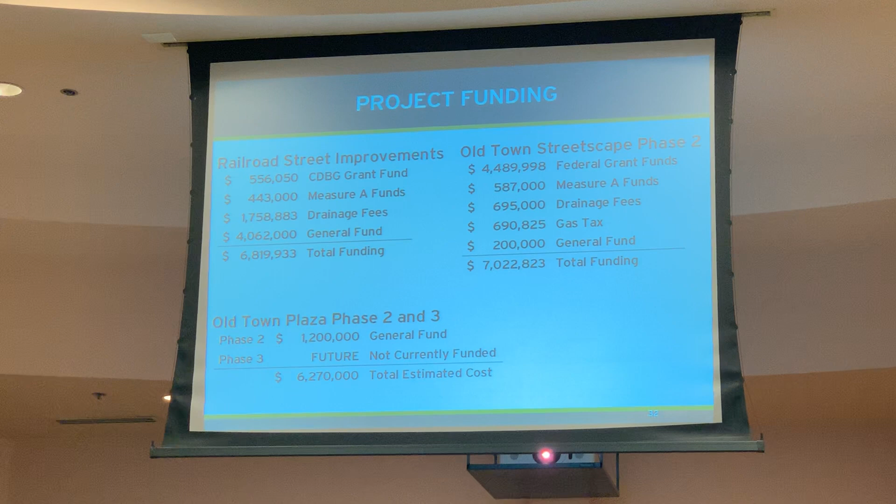Phase 3 is not funded. At this point, we'll be doing schematic, conceptual design of Phase 3 along with the Phase 2 full design, so the overall design is fully incorporated and works together. We'll be estimating the cost and determining if we can find funding sources for some of the site improvements in Phase 3. We would not be building the shade structure, but we'd like to do as much of the improvements as we can obtain funding for with Phase 2.

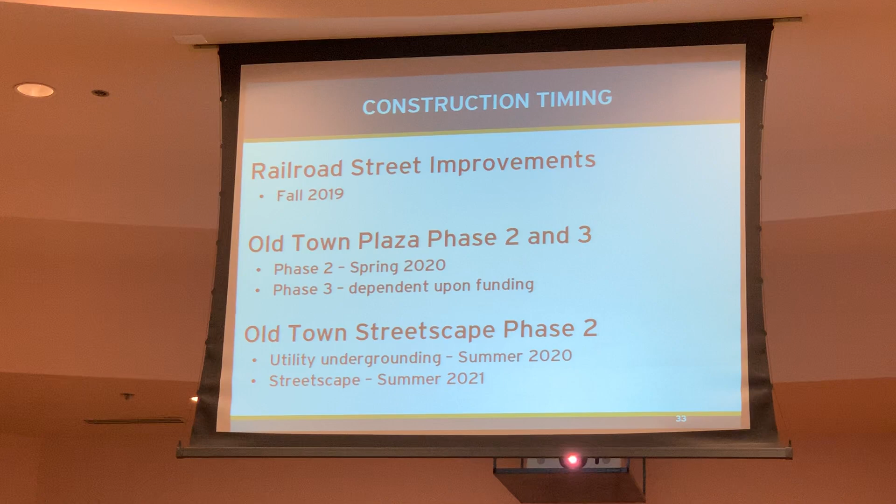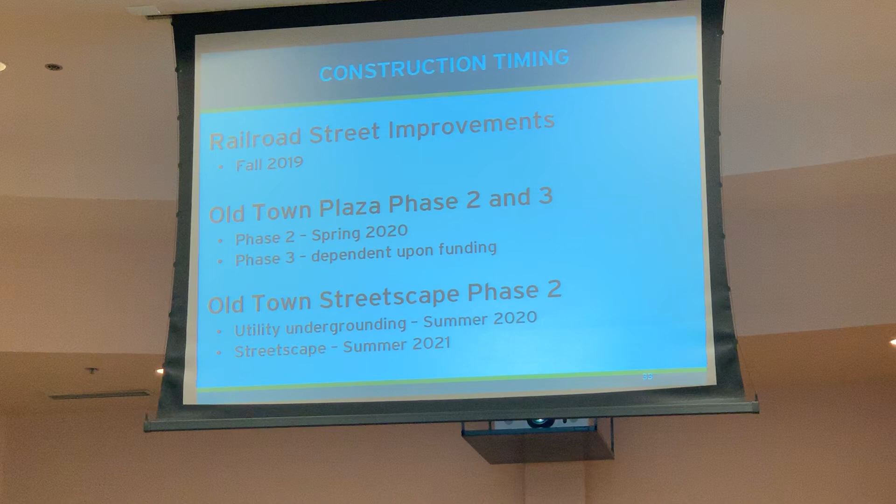So timing: Railroad Street improvements will be the first thing you'll see, expected to start this fall. Construction of undergrounding along Elk Grove Boulevard, and construction for Phase 2 of Old Town Plaza, will both be going on next summer. Construction of the street improvements for the streetscape project will continue the following year, summer of 2021.

There will be ways to get future information and updates about these projects. We'll be meeting with Elk Grove Boulevard residents and property owners to talk about utility easements. There'll be construction notices sent out for all the projects as we get closer to construction, if you live in the vicinity. We'll be doing social media updates as we did for this public meeting to get the word out more effectively to a broader group.

We have been and will continue to provide updates on these projects in the citywide newsletter mailed out to Elk Grove residents. And if you follow our city council meetings, there's a city manager's report during every meeting, and we've now added an Old Town area section to that report, so there will be updates from time to time there as well.

We do have a number of other staff members here in addition to those who have presented and the project managers tonight, so I wanted to recognize and see if I can get everybody.

Bob Murdoch, our Director of Public Works, is in the back. Kevin Busey, who you just saw, is our Capital Program Manager. Ryan Chapman is our Traffic Engineer, he's in the back. I don't think you got to wave at Brian Stone previously, he's the Project Manager for the Streetscape Project, so he'll be back at those boards later. John Griffin is my counterpart at the city, and he has oversight over the Streetscape Project. Ann Grava in the back is our real property agent, she works on most of the city's capital improvement projects, including these.